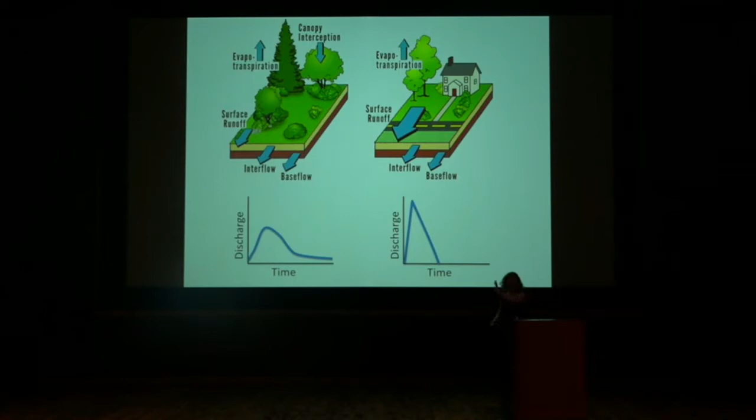Okay, that's fine, I'm glad we all know that. But there is a lot more to urban hydrology and urban watersheds than this diagram, and in fact this is the only time you're going to really see me invoking this concept today. So let me make the case for urban hydrology. I know Sally Thompson was here last week talking about the critical zone, so let's start there. We have the critical zone in urban watersheds too. We have rocks, we have soil, we have vegetation, we have climate. Just because we've urbanized, it does not take away the underlying natural characteristics of our region. But why do we work on urban watersheds? It's where we live.

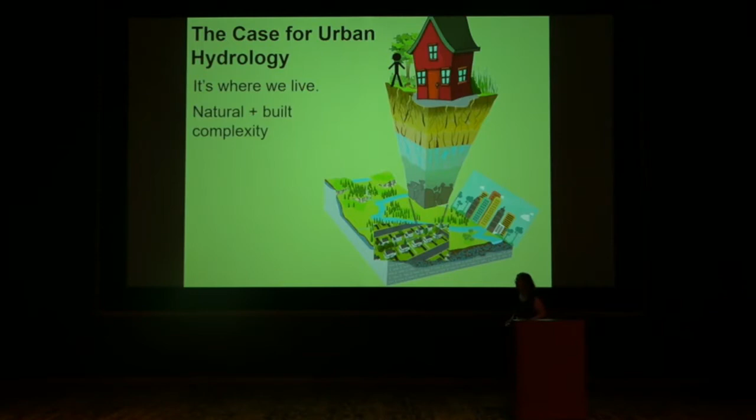People are there, so they're really important to us. We not only have the natural complexity, but now we have the built complexity. We are adding subdivisions, and if this is Reno, these must be casinos and high-rise hotels.

There's a lot of heterogeneity that we add to the land surface, and we also add it to the subsurface. We have pipes bringing treated water in, gas lines in, our sewage out. A lot of those times, those might cross topographic divides, so we have interbasin water transfers happening right and left in urban watersheds.

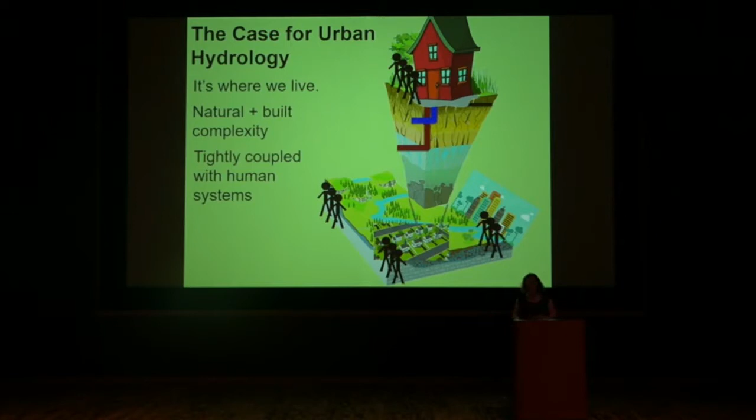So there's a lot of complexity in the urban environment. We're also tightly coupled with human systems. We cannot escape the humans in the urban environment. And these humans, as individuals and as groups, are making decisions that are affecting the management of the natural resources and the built environment. So we cannot study urban watersheds as if there weren't active decisions being made about how to manage these systems.

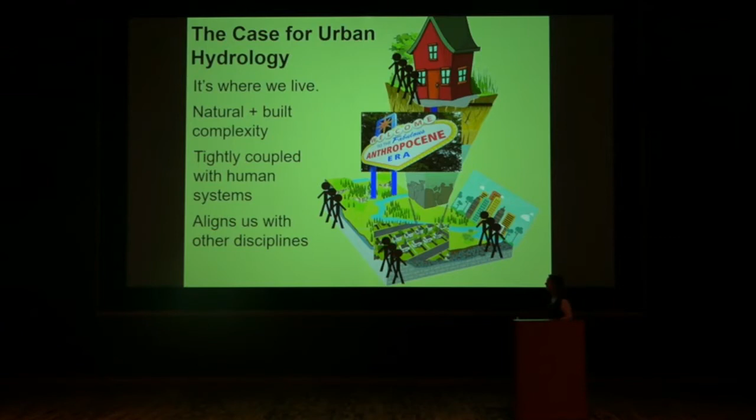Finally, working where the people are aligns us with other disciplines. I think normally that might say Las Vegas, but we're gonna talk about the Anthropocene because the place where our changing climate is gonna have its most significant impacts are the places where people are living, right? That's where we're gonna feel the effects. And so integrating hydrology into that conversation is an important thing that urban hydrology lets us do.

And then finally, it makes us relevant to policymakers, right? We can make arguments that we need to pay attention to hydrologic science because that's gonna tell us about flood risks on the Truckee River, or stormwater runoff, or adequate drinking water supplies for the arid West. Those are the things that are gonna hook policymakers on supporting hydrologic science research, on supporting the USGS stream gauge network, all the things that we want from policymakers. Urban hydrology gives us the buy-in to get there.

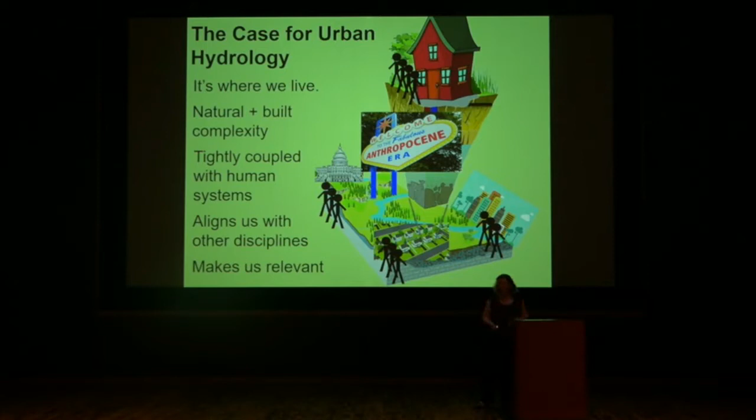So let me break some of these things down a little bit more and give you the sort of one slide per bullet point level of argument for urban hydrology. Again, this is where we live. Charlotte, I think, is something like the 20th biggest urban area in the United States, but it doesn't really matter. The point is there are a lot of big cities in the United States.

Over 80% of Americans live in urban areas, and those occupy less than 3.5% of the United States surface area. And that's just the contiguous states, excluding Alaska. And this is projected to continue to increase. By 2050, it'll be 87% of Americans. Globally, more than half of the population lives in urban areas, and again, that is projected to increase.

We're also now seeing cities that are containing 15 or 20 million people, and they're still growing rapidly. So here's where I put a disclaimer in and tell you that my work is very American and developed world focused, and that there are real issues around urban hydrology and the provision of water infrastructure and sanitation in the developing world that would fall under the umbrella of urban hydrology, but in which I am in no way an expert. So we're gonna set those aside for this talk and focus on urban watershed hydrology as it applies to us here in the developed world.

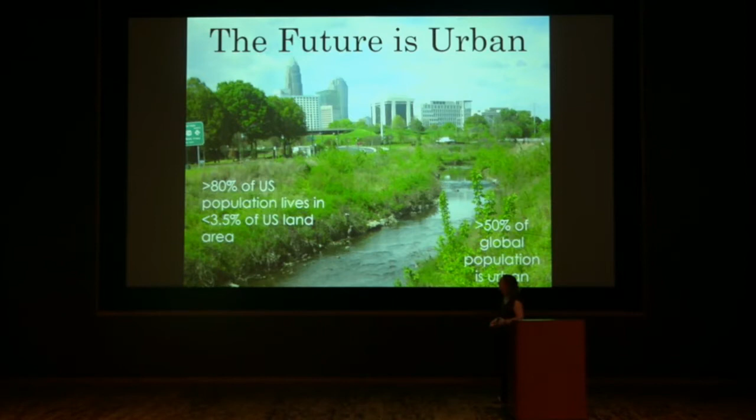I then moved from Charlotte to northeastern Ohio, where I live now. I live about here. And we have Cleveland and Akron, and those are shrinking cities, places where the population is moving out, but the urban infrastructure is still built, and it's still affecting the hydrology. But the cities aren't really shrinking in the metropolitan sense. All this green here, those are areas where the population is increasing. So we have, even with a static population, we have an expanding urban footprint.

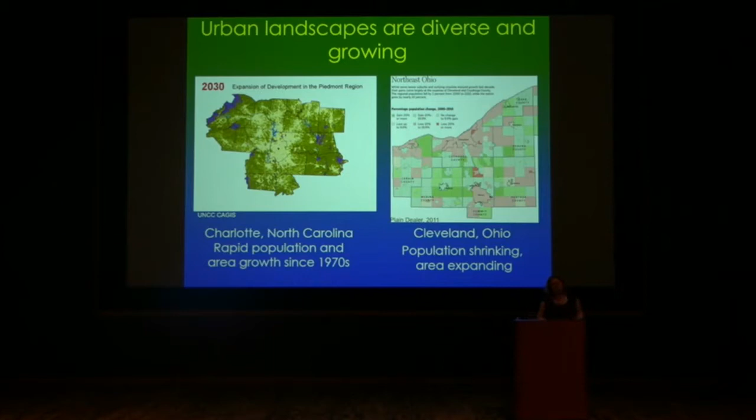We have this urban footprint, but it's on top of the naturally variable climate and landscape. So we have geology affecting topography, affecting soils, affecting the underlying bedrock, the glacial history of a region or not, and then we have climate.

This can mean that the same sorts of urbanization happening in two different areas produces very different hydrologic response. So if we take two cities in the southeastern United States that basically have the same rainfall and same climate regime, and look at the response in base flow or groundwater recharge, we see big declines in base flow and groundwater recharge in Atlanta, and huge increases in Austin.

What's the difference? It's not that people are any different in those two cities, it's that Austin is built on limestone and karst, and water that goes into the soils goes down into the bedrock and supports the streams. Atlanta is built on crystalline rocks with clay soils, and water tends to run off much more.

Similarly, we would say in general that high flows increase as we increase urbanization, but the shape of that increase - is it a linear response with increasing urbanization intensity, or is there some sort of threshold response, or is it something even different? Again, that's going to vary by region.

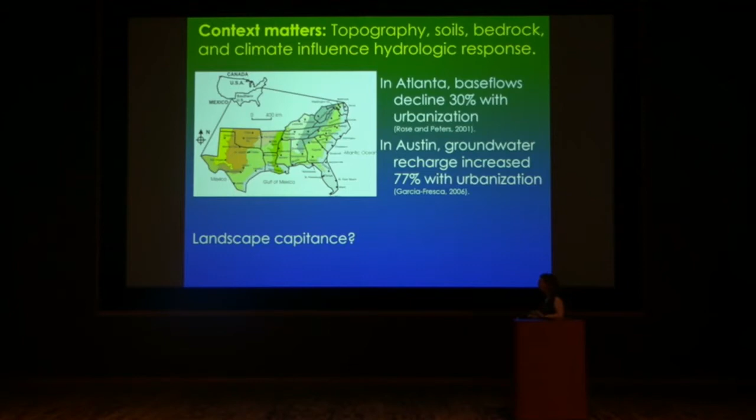Some folks, Brian Miles and Larry Band, have proposed this idea of landscape capacitance, which is sort of the hydrologic ability of a landscape to absorb a land use change or urbanization without affecting the hydrology. So our underlying natural characteristics plus our climate are going to affect the hydrology we get in urban areas.

Meredith Steele has done some really interesting work on just looking at the shape and distribution of water bodies in different environments. So this is sort of taking our natural environment times the land use decisions we make when we urbanize and looking at the hydrologic response. This is one figure from one of her papers.

Things have gotten a little cut off, we've lost some axes, but this should be the urban water body density pre-development versus post-development. What we see is that in dry areas, when you urbanize them, you get a higher number of water bodies in that landscape, and in wet areas, you get fewer of them. So that's an idea that there's sort of a convergence in the density of water bodies, number of water bodies, area of individual water bodies, or a homogenization of surface water expression as a result of urbanization.

That work aligns with some work that Peter Groffman and colleagues have done, and they've proposed this idea of ecological homogenization of the urban environment across cities, so that Phoenix and Baltimore might look more like each other in the urban area than they look like their natural counterparts outside.

However, if you go a few more figures in Meredith's work, you can kind of come up with a different interpretation. Here she's plotting a change in water body area versus a change in water body density. So some areas are getting wetter and some areas are getting drier. Sometimes water bodies are becoming more consolidated and sometimes they're becoming more fragmented.

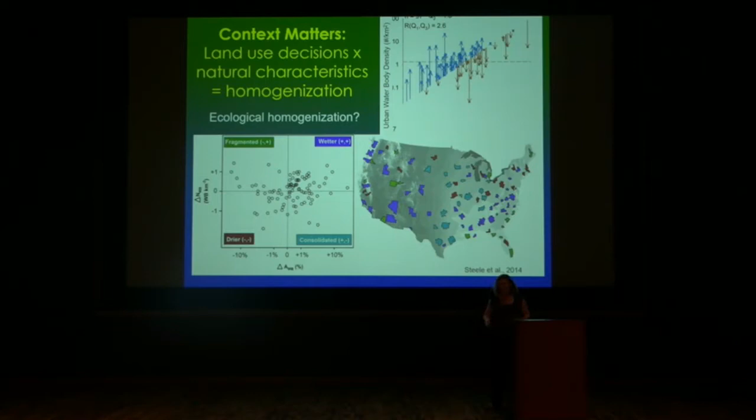So they're all ending up looking more like each other, but the pathways or the impacts of the urbanization on the natural landscape are quite different. You can see some regional patterns here - the southeast and the west are getting wetter, and the Midwest is getting more consolidated. What's driving that? Again, it's not the people that are different there, it's what the landscape provided in terms of water bodies to start with.

That segues nicely into another level of heterogeneity, the built complexity of the environment. So this is my old subdivision in Charlotte. This is downtown Cleveland. Obviously, the intensity of the development in these two areas is quite different. The age of development is quite different.

Whether we are talking about changing urban hydrology by going from forest and farmland to urban, or whether we're talking about redeveloping brownfields or abandoned industrial sites, that's a really different proposition in terms of the potential hydrologic ramifications.

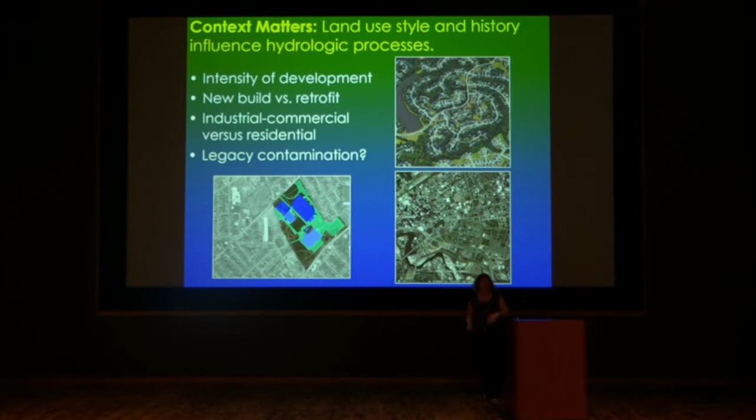Even within a city, we have land use variability. Here's a neighborhood, probably about 45-50% impervious surface cover, all fragmented up into little tiny backyards and front yards. This colorful area here is an industrial site, 62 acres, 52% impervious, but our impervious surface now comes in much larger chunks. This is a 6-acre rooftop.

It is enormous, right? And so the hydrologic impacts of this 50% impervious versus this 50% impervious is probably really different just because of the spatial arrangement of the imperviousness.

And by the way, you can't dig in the ground here because of legacy contamination issues, and you can't export any materials off-site.

So we also have water quality. While I'm focused on water quantity, we also have all these water quality repercussions of urbanization and different land use histories and land use choices.

It doesn't stop at the subsurface or the surface. Our subsurface architecture is also dramatically changing the hydrologic response in urban areas. So we have storm drainage, which is basically designed to efficiently shed water from parking lots and rooftops into the nearest water body by piping it. We're really increasing the drainage efficiency of the landscape.

We also have wastewater. In a new modern city, we would send our wastewater to the wastewater treatment plant, where it would then form a point source of discharge to a local water body. So we're potentially having an interbasin water transfer and a big point source of discharge that you wouldn't pick out on a map of the stream network.

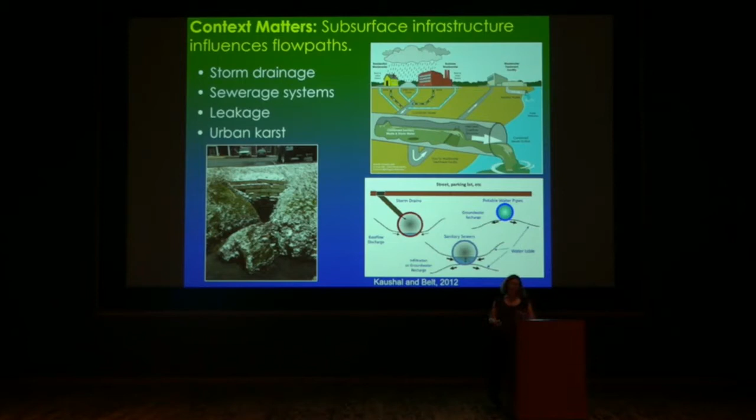We might be exporting a stormwater flow that has actually never really been surface runoff. The magnitude of these leaks and all of the other subsurface manipulations to hydraulic conductivity, utility trenches, subway systems, basements, all of that sort of thing have caused some hydrologists to describe urbanization as a karstification process.

Let's talk about stream channels. I haven't seen the Truckee River yet, but I'm hoping to later this afternoon. We're really fond of manipulating and engineering stream channels in urban areas. These two pictures were taken by my colleague Aditi Bhaskar in the same creek, less than a mile apart. The potential interaction between Little Dry Creek and its riparian zone or groundwater are quite different in these two pictures.

This is my friend Little Sugar Creek in Charlotte. What is this? This is dry day flow, perennial base flow, coming out of, well, that's not a bridge, that is an opening from a buried reach of stream. Here I am in a buried stream in Raleigh, North Carolina. Again, it hasn't rained in days or weeks, but we are seeing a stream under the subsurface. Many urban areas have lost essentially the entire tip of their drainage network. All your headwater streams are buried in places like Philadelphia, Cleveland, and Baltimore.

And an even higher percentage of streams have been cut off from interaction with groundwater because of channelization.

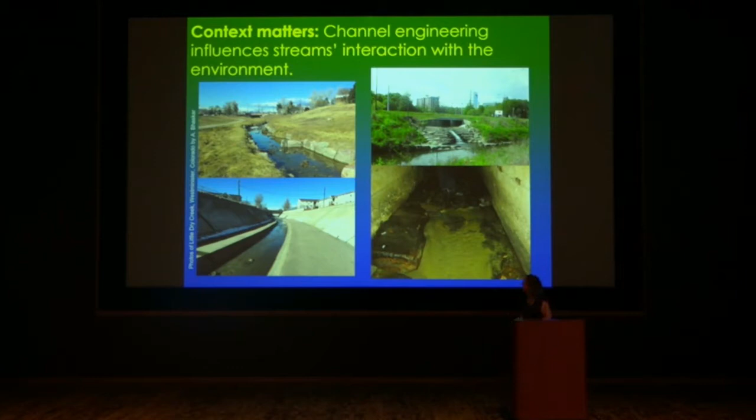All of that is about things people build, but people also act, and we make environmental decisions even when we don't think we are making environmental decisions. Individuals and institutions are influencing urban hydrology every day through the things that we do.

Institutions could be a homeowners association, a park district, your city council, the state, or the federal government. They're making decisions based on rules and regulations, incentives, who's the squeaky wheel that gets the grease, and cost. There's some sort of formal framework governing a lot of the decision making at the institutional level.

But there are also social norms. We're gonna do this because we've always done it that way—how many times have you heard that? Same thing applies to the management of urban water. We're not gonna build permeable pavements because we heard they're a pain to plow in winter. Individuals make decisions about keeping up with norms, keeping up with the Joneses—I better have a nice green lawn in Reno because that's what my neighborhood wants. But institutions make decisions that way too.

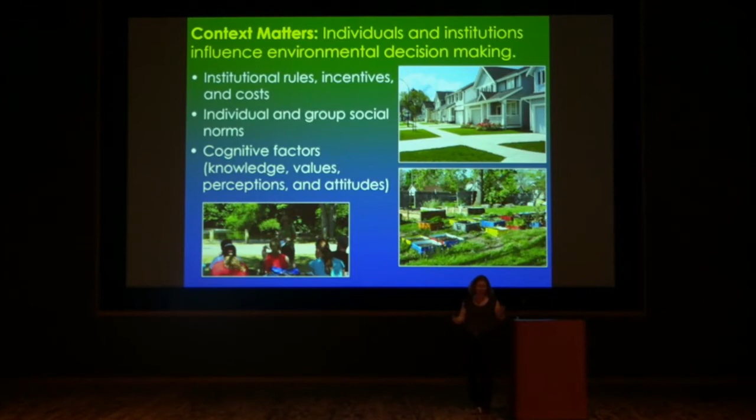Then we get down to cognitive factors: people's values, knowledge, perceptions and attitudes about the environment. Do they consider themselves pro-environment? Pro-green lawn? How do they perceive things? Is wastewater or stormwater a resource, or a problem?

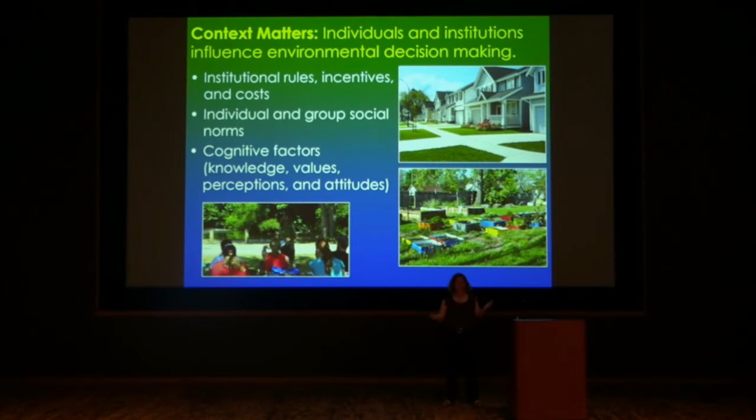Knowledge is one piece of this, and often our tendency is to say if you just knew more about water, you'd exhibit more pro-environmental behavior. It doesn't work like that. That's a really ineffective communication technique because of what's known as the knowledge to action gap—just increasing people's knowledge doesn't necessarily translate into action, particularly if that knowledge is at odds with their values, attitudes, or the norms and rules they're working under.

It's also about listening to people telling you what they perceive or what's important to them. We get much farther working on all these other levers rather than just educating people—although I do educate people too. I'm working with a group of teachers in that picture, talking about stream geomorphology and hydrology, and they'll bring that back into their classrooms with kids. So there's certainly a role for education as well.

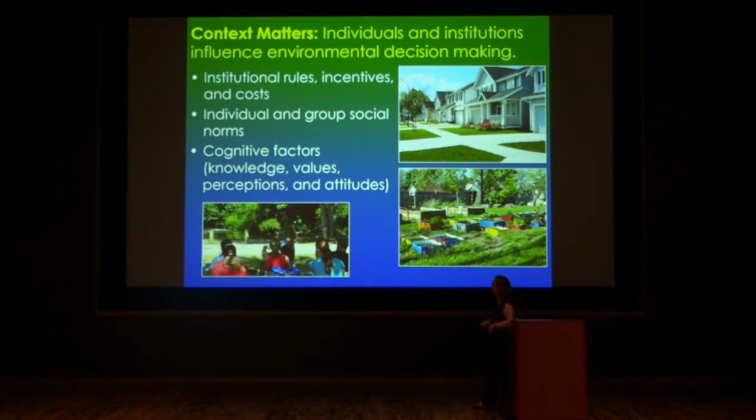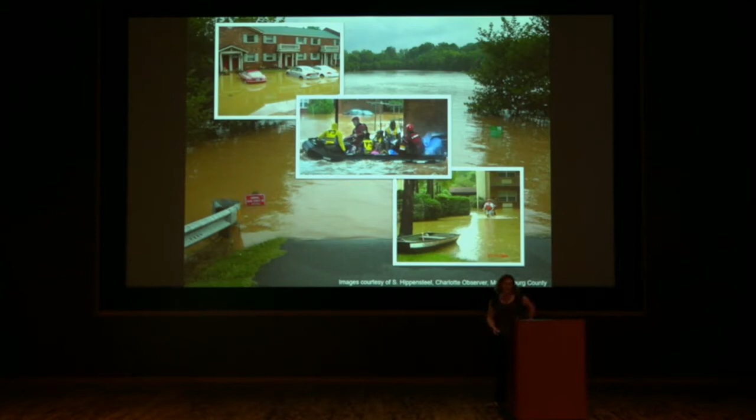This sign says warning, trails subject to flooding. Charlotte maintains a swiftwater rescue team to evacuate people from homes and businesses due to urban flooding. In Florence, they had it again—6 inches of rainfall. So we have to think about all these systems responding to a variable and increasingly intense climate.

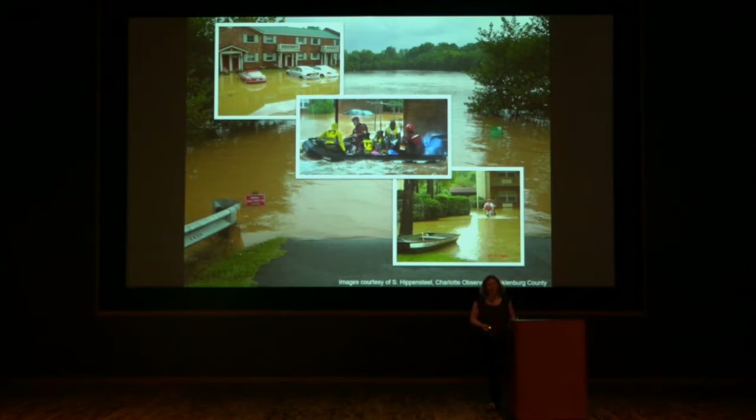But that's where we can come back to the human systems, because what is Charlotte doing? If you look closely, not only is there a trail, but that's the top of a soccer net. This is a good use of a place that floods, because we're not building homes and businesses there. Charlotte is actually aggressively buying out flood-prone homes and businesses and getting people out of the floodplain. That's a social system working to alter the response to the hydrology, and by creating floodplain storage, peak flows might be somewhat more dissipated as we move farther downstream.

So we have all these things happening in urban watersheds, and I was on the plane yesterday thinking, which is the most important? Can we think about these as a hierarchy of controls in urban hydrology? This is my personal ranking of things. I think that ultimately, the natural capacitance of the landscape, the geology and the climate, is going to influence hydrologic response. Reno is never going to be Charlotte.

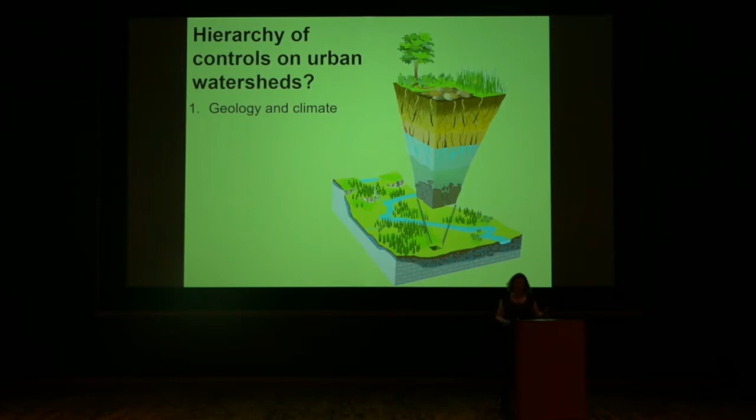We also have the decisions that we've already made, the legacy land use and infrastructure decisions, the things that are already built. As the shrinking cities are discovering, you don't unbuild pipes and pavement just because people have moved out. Those continue to be there.

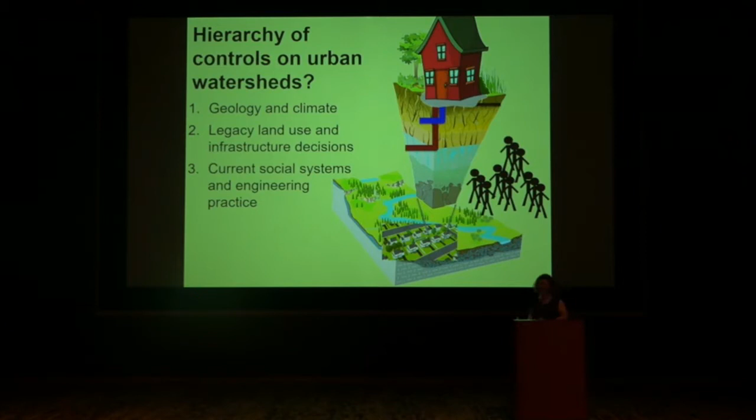Then we get the current social systems and engineering practices that we follow now. These are the decisions we're making today that are going to affect things today and into the future. And then we get the decisions we make about the future. This could be local or individual level decisions, like I'm not going to buy that house in the floodplain, or as a city, we're going to buy out the floodplain. Or they could be about how we're going to mitigate or adapt to a changing climate.

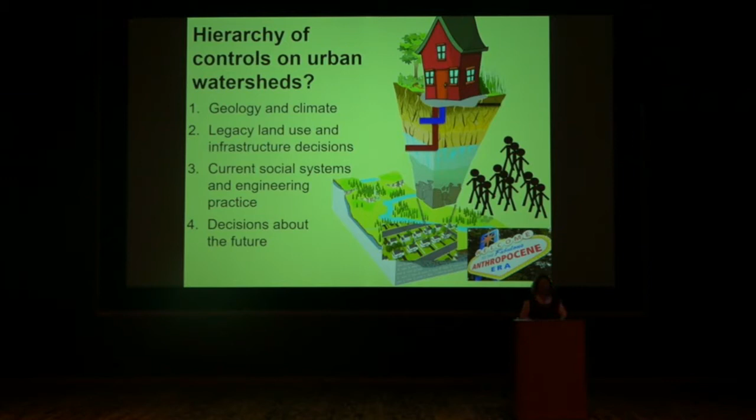So this is what I would come up with as a hierarchy of factors influencing urban hydrology. Let's zoom in now to my research, because of course I can't work on all those things. I think they're all fascinating, and there's things I'd love to add to those previous slides.

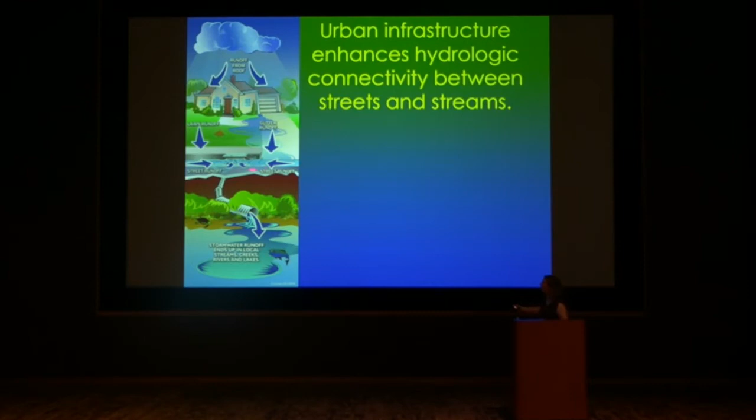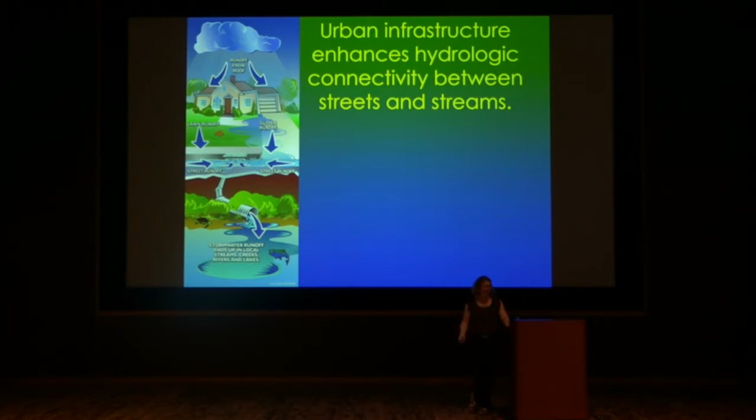I've really focused my work on stormwater runoff and stormwater management. Drawing on the idea that one of the fundamental changes urbanization has on the landscape is increasing the drainage efficiency and hydrologic connectivity via downspouts, gutters, curb and gutter, and storm sewer pipes out to the stream. That's busy delivering water out to the stream and delivering all the other yummy things we put on our landscape - our fertilizers, our dog poop, our brake linings - all of that is coming into our urban watersheds. This enhanced hydrologic connectivity increases peak flows, increases bank erosion, degrades water quality in a whole host of ways, and all of that ultimately flows down and affects stream ecosystems.

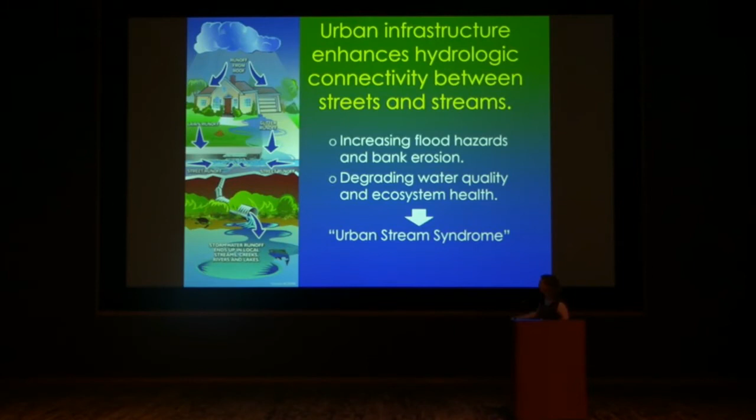Ecologists have coined this urban stream syndrome - a host of ills or symptoms that result from urbanization of the landscape. So if you don't think this is a pretty picture, and you're like that fish and you're unhappy and you want to do something about urban stream syndrome, I would argue that the number one thing you need to do is to stop stormwater.

We need to keep that runoff out of the urban streams, or at least slow down the flow. I am not telling you anything new - Luna Leopold published a great paper on hydrology, land use and urban planning in 1968. We have been building stormwater management structures in our urban areas since the 1970s, and they've evolved over time.

A lot of the early generation of stormwater structures, which are still built today, are centralized near the outlet of a neighborhood or development, or all the way at the end of the Walmart parking lot. They're focused on detention, on slowing the flow down. There will be some outlet structure with a pipe of a certain diameter, and the release rate of water from that pond or wetland is controlled by the diameter of the pipe and the hydraulic head. That's good - it doesn't affect the water balance, but it slows the release rate, and there might be some settling and biology happening in that pond to change water quality.

We could string several of these things together and improve the system, but these days the big vogue thing gets called lots of different names: green infrastructure, low impact development, or source control. The idea is that rather than waiting for all that stormwater to get to the end of the neighborhood, we try to stop it very close to the source - things like infiltration trenches and bioretention cells sprinkled throughout the parking lot, a rain garden in your front yard, a green roof - all of these are source control.

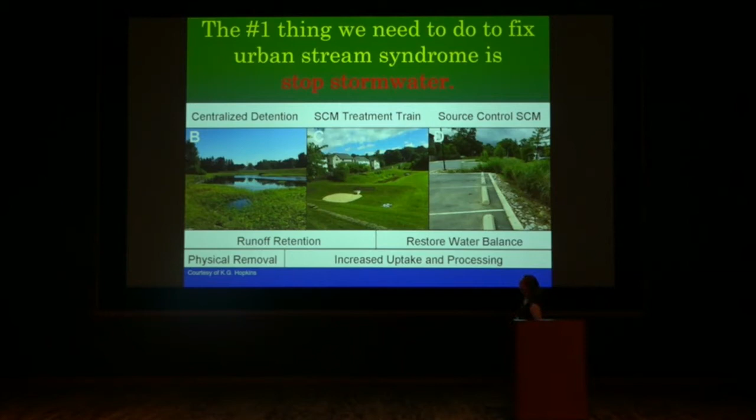Okay, so I told you I wasn't the first person to think of these things - we've built millions of them. By a really rough estimate that I've done, we spend something like $1 billion a year on stormwater management in the United States. And people have been studying them.

There are probably thousands of papers out there that have looked at the flow coming into a pond and the flow coming out of the pond, measured some water quality parameters, and said the pond improves water quality and reduces peak flows. If you boiled all of those thousands of studies down, you would see that for any individual type of stormwater control, there's a broad range of effects.

So that's fine and good. We know a fair amount about that. The question that really has been driving my research for the past few years is what happens when we start to add lots of these stormwater controls to the landscape.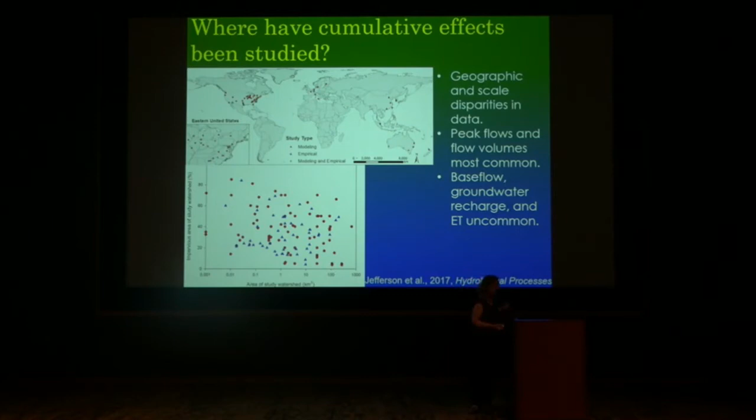All right, well, but what do we know? We know a fair amount about peak flows and about flow volumes, because those are the things our regulations have focused on. However, if you want to know about low flows, groundwater recharge, evapotranspiration, this gets to be pretty sparse. There might only be 2 or 3 or 1 dot on that graph that has actually quantified the effects of stormwater controls on, say, evapotranspiration.

And then peak flows—well, that covers a lot of ground. Is it a whole series of peak flows from a distribution of different size events? Are we talking about the 2-year peak flow, the 100-year peak flow?

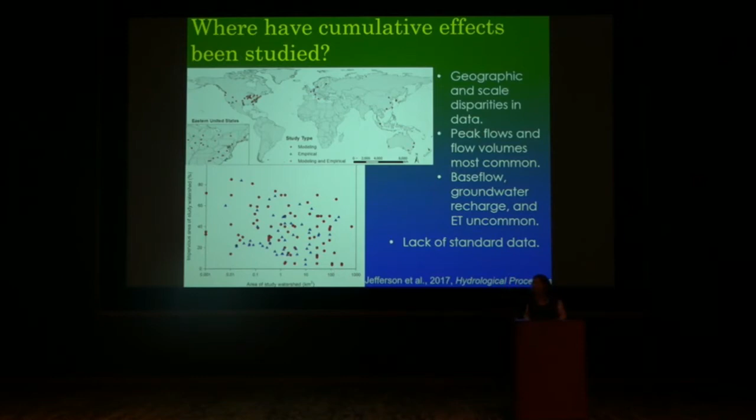When we started to really break all of these 100 papers down, we couldn't actually do the quantitative meta-analysis that we wanted to do, because there was very little standardization in the metrics people were reporting. What were the controls? Was your control watershed an undeveloped watershed, or was it a watershed with no stormwater management? There's no standardization among the studies that are available.

So what we eventually came up with was this sort of hypothesis. And now the challenge is to put data on our hypothesis.

So if we take untreated impervious area and a hydrologic metric of our choice—let's just take 2-year peak discharge here because we actually have some data—we know that as we increase impervious surfaces, we will tend to increase peak discharge. The shape of that arrow is going to be dependent on that landscape capacitance, and all those urbanization and land use choices.

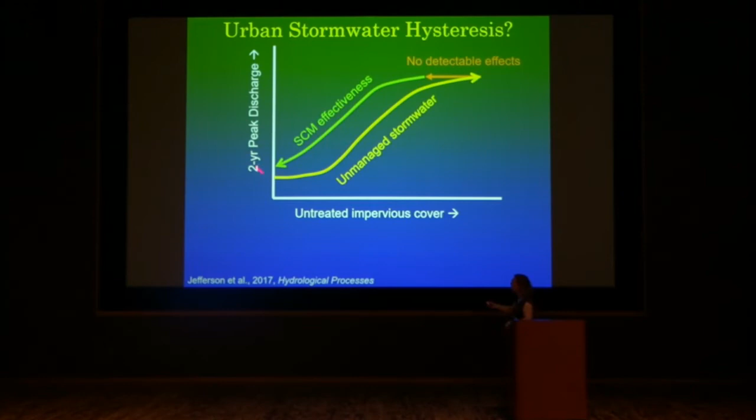If we have a 10 square kilometer watershed and we put in a pond that treats 20 hectares of land, are we going to see the effects of that? Probably not. As we start to add stormwater management to the system, there's some amount of investment where we can't detect the effects - we don't see the outcome at the stream gauge at the bottom of the watershed. But if we continue adding stormwater management, we'll start to see an effect until eventually we've treated all the impervious area, but we're not quite back to where we started. We expect some residual because of all the other things changing in the system, and the fact that no stormwater control works perfectly.

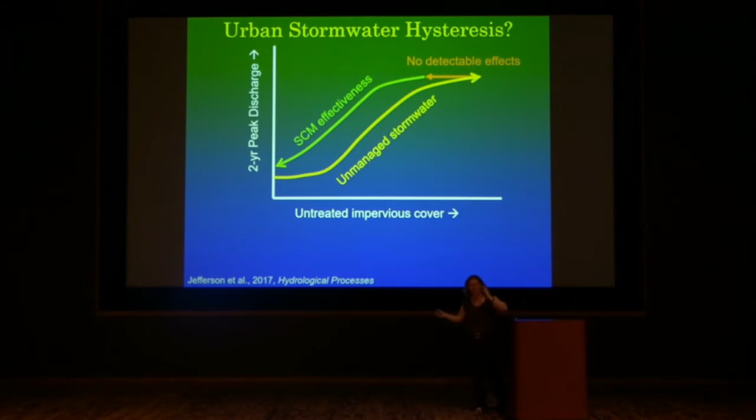This is the hypothesis we've put out to the hydrologic community - show us the data, this is what we've gleaned. We have a bunch of these metrics, a bunch of these figures. Let's see how they work in real places.

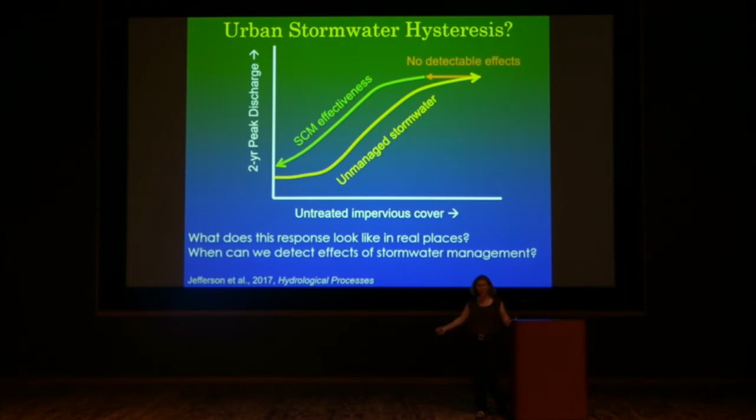A big question I've been stuck on is: how big is this zone of detectable effects? How much investment do we need to pour into managing stormwater in urban watersheds before we can go back to our stakeholders and the people paying the bills and say, guess what - it's working, your peak flows are going down? Because that's what they really want to know.

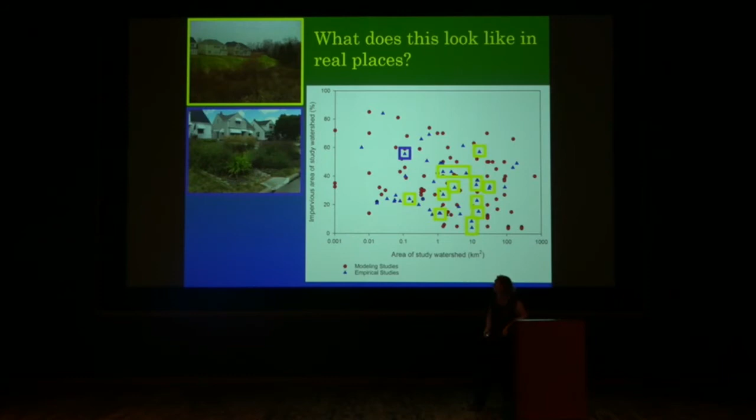I'm going to quickly tell you three stories: one from Charlotte with a series of USGS gauges, one from the Cleveland area where we experimentally manipulated streets so we could do a paired watershed study, and a modeling study slowly coming towards review and press, also in the Cleveland area, of a larger watershed.

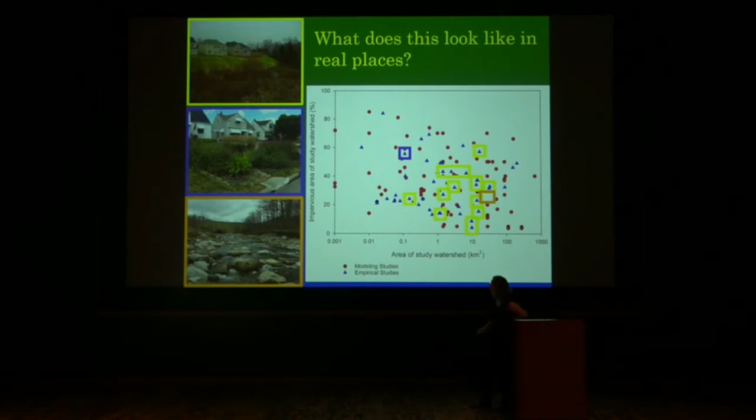Back to Charlotte, North Carolina. Charlotte, because of its urban flooding problems, has one of the densest USGS stream gauge networks in the United States. The county also built a comprehensive stormwater control management database, so we were able to know where all the stormwater controls were and how much water they were treating. Because of its urban flooding issues, Charlotte has had a stormwater fee for more than a decade, spending $25 million a year as a city-county in managing stormwater.

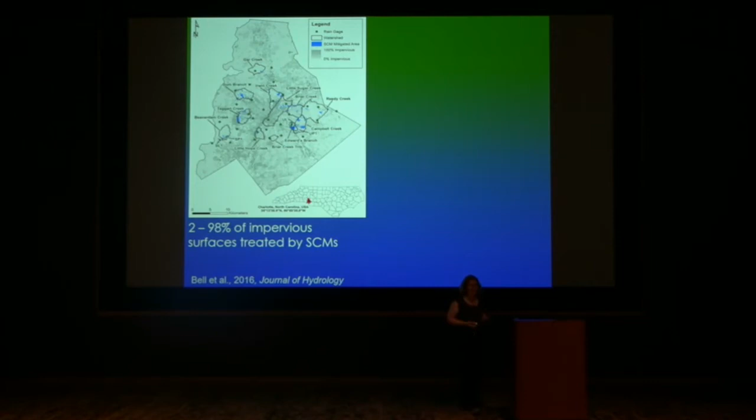They don't. In every single metric, impervious surface is the number one predictor of hydrologic response. I'm just showing you one here: runoff ratio. We thought maybe if we segregate out small storms from big storms we'd see something different - no, it's just impervious surface. So that tells us something about this landscape.

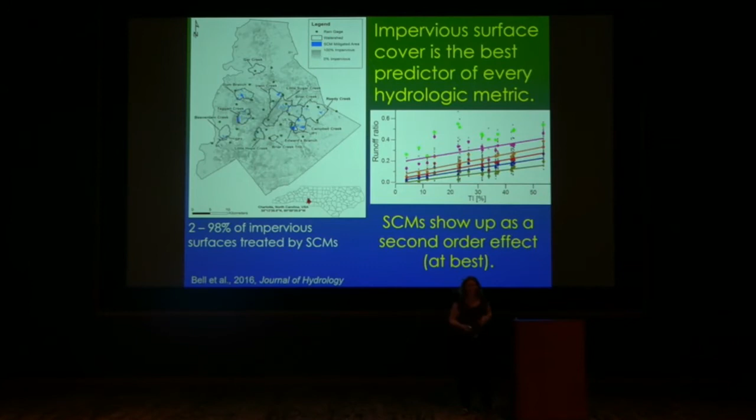It was only when we took the residuals between the individual watersheds and their trend lines that we saw stormwater controls show up. They show up as a second-order control, and even then not in every hydrologic metric - sometimes it's tree cover in the watershed that's important. So what does this tell us? It says that with our existing monitoring network and space-for-time substitutions and all the quirks of what's happening on the ground, we have a really hard time detecting the signal of stormwater management in this urban area that has invested tens and hundreds of millions of dollars in it.

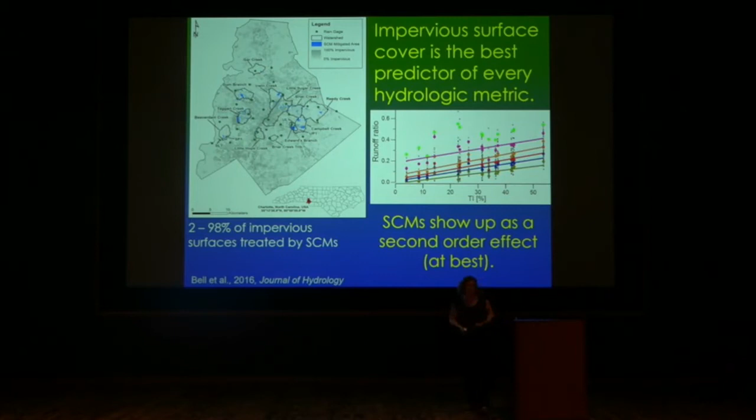Why is that? We started to drill into it with some breakpoint analyses. This is a low impervious watershed and a high impervious watershed, and we plotted precipitation versus peak discharge. In this watershed, it can rain up to 10 millimeters and the stream really doesn't do anything, and above that stream flow goes up. In this other watershed, it can rain less than a millimeter and then the stream starts to respond.

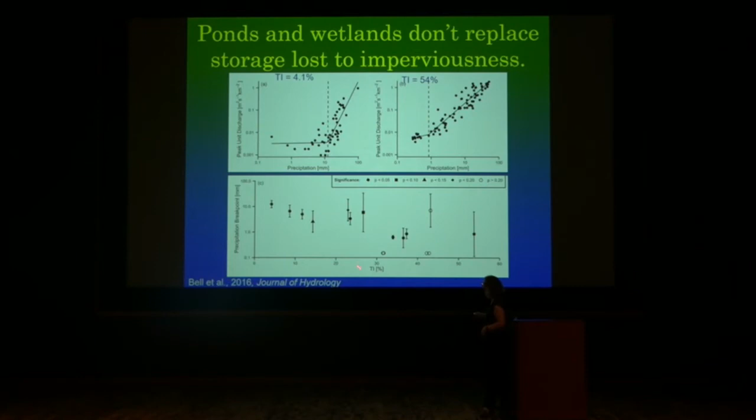If we plot those breakpoints for all of our 16 watersheds, notice that again we're plotting it against impervious surface - it's not stormwater control that shows up, which tells us that the stormwater control we're putting in the form of ponds and wetlands is not replacing the storage or landscape capacity that's been lost as a result of urbanization. All the topographic roughness, puddles, and canopy interception - all those vehicles for storing water are being decreased, and our ponds and wetlands are not sufficient to override that signal.

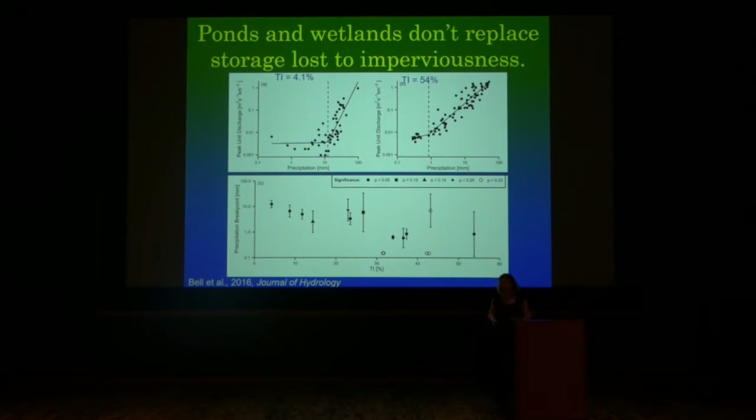All right, well that was pretty depressing. So let's control the conditions. Let's build it and see what happens.

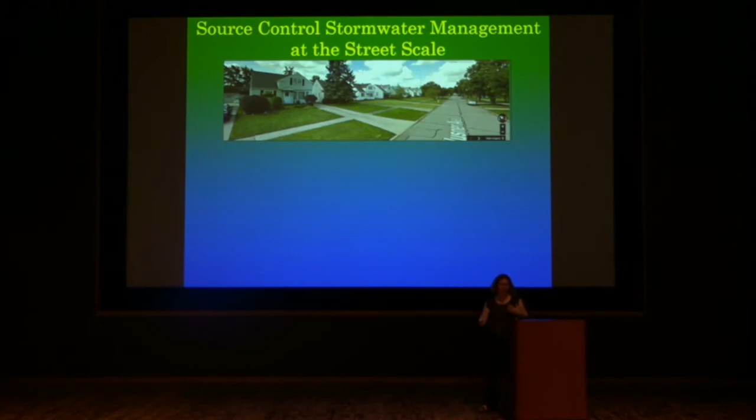So now we're up in suburban Cleveland, a 1950s development. We want to put stormwater control in this street, because right now it's just dumping its stormwater straight into a stream inside a park. And so with money from the Great Lakes Restoration Initiative, we designed a paired watershed, a before-after control impact design.

And so we focused on bioretention cells collecting street runoff. In this, Clevelanders call this the tree lawn. Akronites, like myself, they call it the devil strip. Anyways, that's the area we have to work with, and in a few cases we put rain gardens, and we also gave homeowners rain barrels.

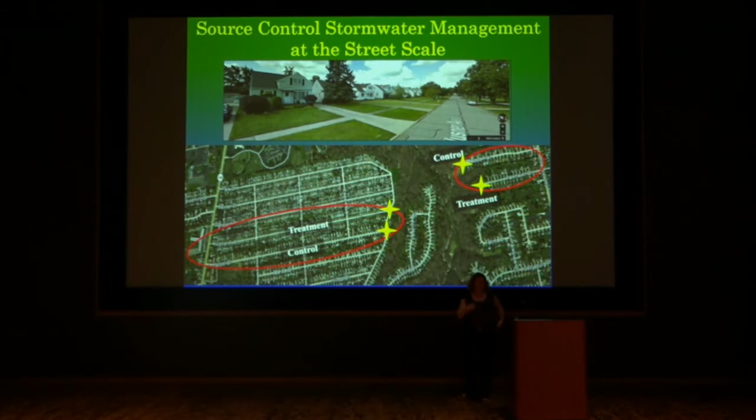So we set up 2 treatment streets, 2 control streets, monitored them for a year, and then went out and tried to convince the homeowners to let us rip up part of their front lawn.

There are about 200 houses on Klusner Avenue, and I'm just going to focus on Klusner Avenue. We succeeded in convincing 12 places, and that wasn't even 12 individual homeowners, but that was just 12 places where we could put bioretention cells in. Those people also got to have up to 4 free rain barrels, so we got rid of 22 of those. And 2 people had nice street trees, so we put a rain garden in the front yard instead.

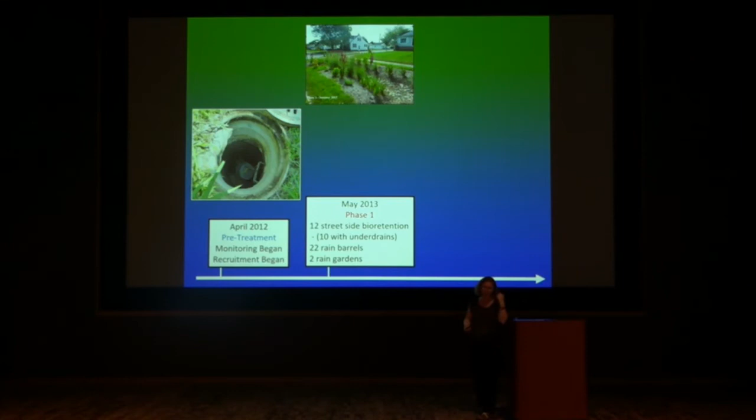The rest of the people, we knocked on doors, we flyered, we had town halls. We could not get anybody else to participate. Until they saw their neighbors getting these free gardens, and then they started calling us. Hey, why didn't you ever tell us about that?

So phase 2 happened because we had money left, and we built some more street-side bioretentions. We changed the engineering of them a little bit. We put in some more rain barrels and built some more rain gardens in front yards and backyards.

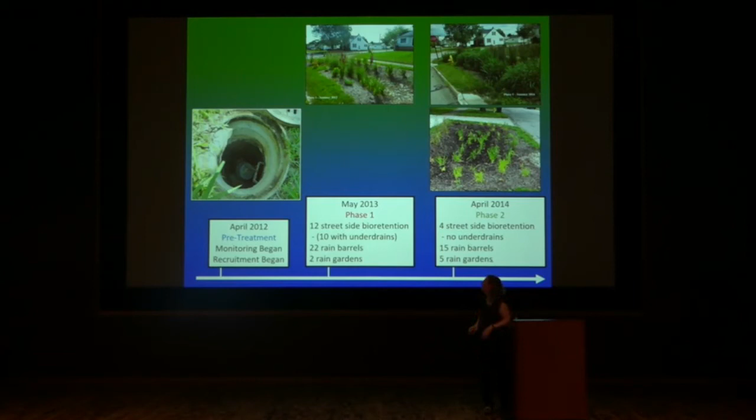The plants, this is the same rain garden in 2013. Here it is in 2014. It was great. We got, as a total, 12.5% homeowner participation. Let me give you this for free. Oh, we'll take care of it too. 12.5%.

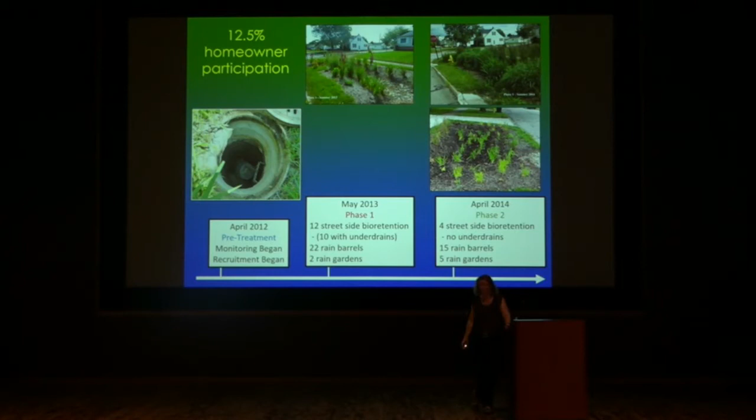But it worked, yay! So this is our control watershed. This is our treatment watershed. We have our pre-treatment data, and our phase 1 data looks just like our pre-treatment data, but phase 2 is lower volumes of storm flow in our storm sewers from the system, and that is a statistically significant difference. So it's decreasing by up to 40%.

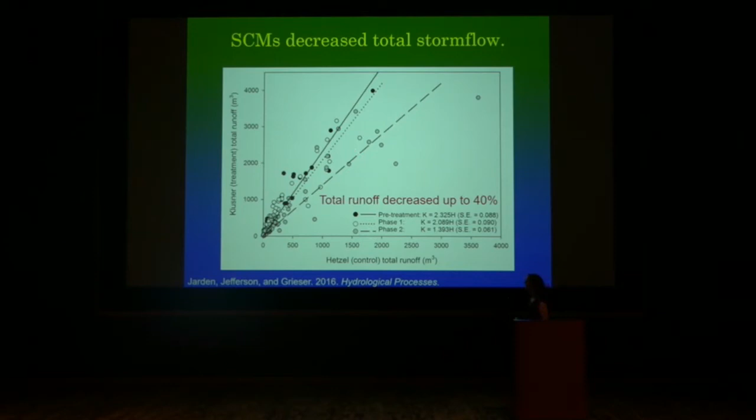The peak flow data is messy because real world data is messy. In our pre-treatment period, we didn't get any storms that generated high peak flows. But we see this shift downward between phase 1 and phase 2 in our larger storms, and no significant difference in our little storms, which is sort of interesting.

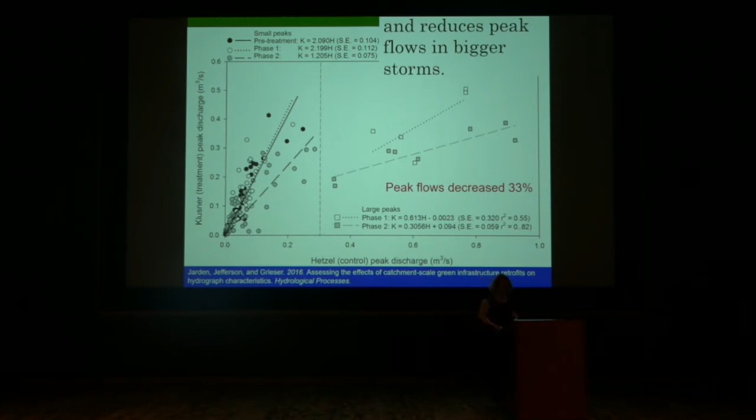So now we have to interpret this. So why did phase 2 work so much better? So this is a cross-section through a bioretention cell, and in phase 1, all of the bioretention cells had this overflow inlet and this perforated pipe plugged back into the storm sewers. So if water infiltrated down and then entered that pipe, it could go back to the storm sewers.

In phase 2, we didn't build that in there because it saved us money, and it turned out that we didn't really think we needed them. So now any water that flows into a bioretention cell in phase 2 has no opportunity to return to the storm sewers, and therefore our volumes are going down more dramatically, and our peak flows go down. Because in phase 1, we had curb cuts and this gravel superhighway channel running right to our overflow inlet.

In phase 2, there's no underdrain, therefore no overflow inlet, therefore no gravel superhighway. Now water is forced to spread out and infiltrate.

Why did we see effects in big storms and not little ones? It takes a certain depth of flow along the curb for water to actually turn the corner and go across that slightly rough curb cut into the bioretention zone. My poor grad student went out there and stood on the street a lot in the rain to figure this out. If it's raining lightly, the water just continues to the storm sewer catch basin, but if it's raining hard and the depth of flow along the curb is deep enough, it goes into the bioretention cell and we take it out of the system. The tiny little details matter, right?

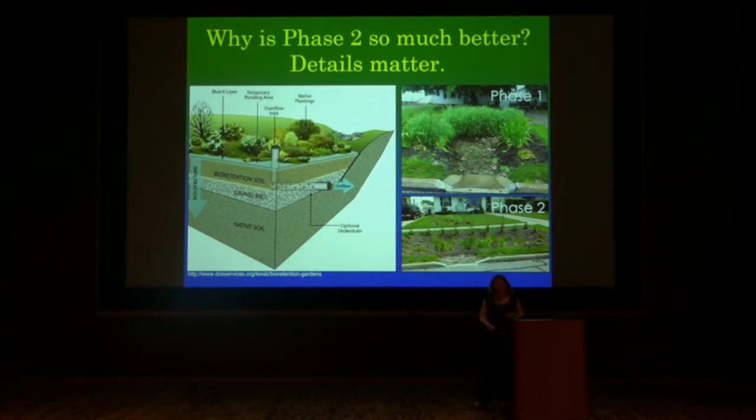We also talked to the people, working with social scientists. My grad student got really into this, and so we ended up with a whole other paper. I should say this is a master's thesis, and we got 3 papers out of it, so pretty awesome grad student in 2 years.

So what did we find? We reviewed lots of documents, we did a survey, we talked to people. Again, we had this low participation even with incentives. We see that in other studies where they've even tried to pay people to adopt stormwater practices on their lots. Very low participation rates.

Because people view stormwater management as not an individual problem. Shouldn't the city be taking care of that, right? Why should I do it on my property?

But we did see this social contagion. My favorite block is this one 87-year-old grandmother who treated it as a neighborhood beautification project, and talked her neighbors into it. We have 5 bioretention cells in a row. Next block down, there's none.

Is that optimized from an engineering point of view? Absolutely not. But from a social point of view, it was incredibly important for us that our participants participate voluntarily. We weren't going to say, we're going to dig up your front yard without you, because people value their green space. And the last thing the park district and the city want is a bunch of antagonized people.

After the project was over, we surveyed the homeowners. They could see what was happening, but we didn't really share data with them. We just wanted their perceptions of whether this project was a success or not.

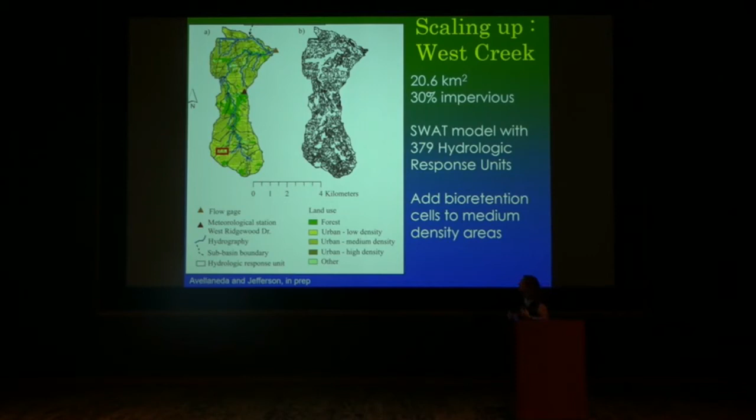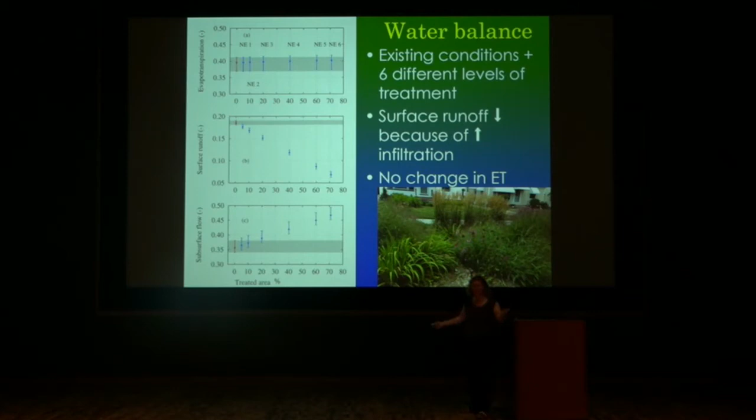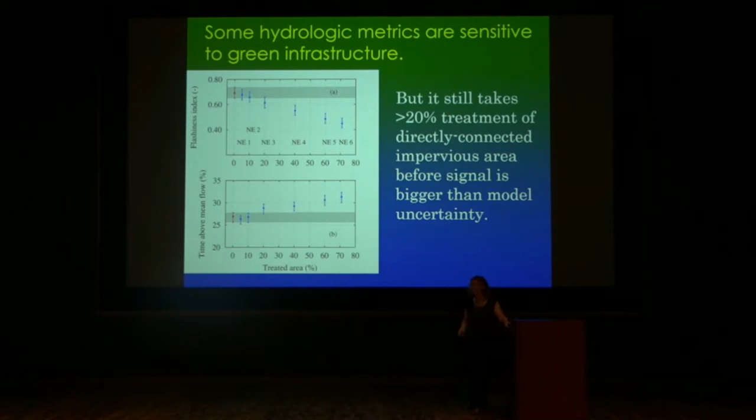But those are not your favorite hydrologic metrics, you say. Well, we can calculate anything, that's the beauty of a model. The 1 month flow, well, we can get there, but now we're basically convincing everybody to put a bioretention cell in on their property. That is maybe not socially realistic.

Can we move the 1 year peak flow? No, partly because bioretention cells in Ohio are not designed to treat the 1 year storm. They're designed to treat 3/4 of an inch of rain, which is about the 90th percentile storm. So if we set our environmental goal of stormwater management to reduce the 1-year peak flow, we'd be asking an unrealistic thing for the technology we're using. So we have to manage our expectations.

We know subsurface flow is increasing. Are our low flows going up? Not really, not in any detectable way, but look at the size of some of these uncertainty bands. Urban watersheds are really hard to model. We've got to get all those natural processes right, and we have to get all the built environment right, and there are basically no modeling frameworks that can handle all that. And even if they attempt it, they become completely over-parameterized monstrosities, so you have big uncertainty bands associated with it.

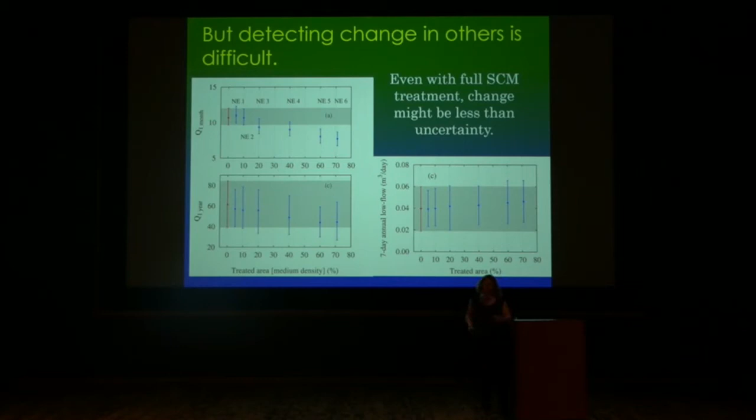So some of this is a science, a modeling techniques problem, and some of it is a stormwater problem at this point. So what are the takeaways? At small scales, we know that source control works. At larger scales, it's gonna take a lot of investment to get a detectable effect. And we have to be realistic about our expectations. We cannot ask something that is hydrologically impossible of our system. So if you're communicating with a stakeholder group or a policymaker, you might say it's not really realistic to decrease the 100-year flood in my urban watershed because I've added some rain gardens.

It's just, we're not putting the storage into the system to do that. Models are a pain, real data even more painful. Remember my experimental watersheds, the double paired watershed study? In the second one, they ripped up the street in the middle of our study, and then repaved it with really nice pavement, but stormwater didn't go down. We think it's because in the past, stormwater could fall off, the curb and gutter was all broken up, and the pavement had secondary permeability. So they made the stormwater worse by repaving the street. Real data, it's a pain.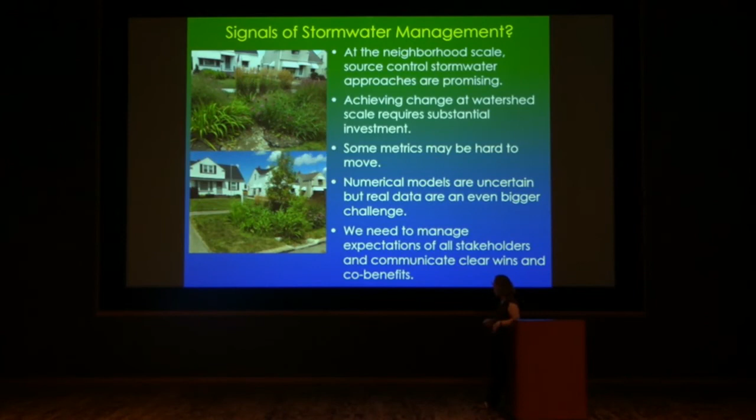So we need to manage expectations, we need to be communicating, and we also need to think about co-benefits. Maybe we can't win all the hydrologic metrics, but maybe we're increasing property values, or creating habitat, or there are other things we can do along with stormwater management that will create the win we need to also get the hydrologic benefit.

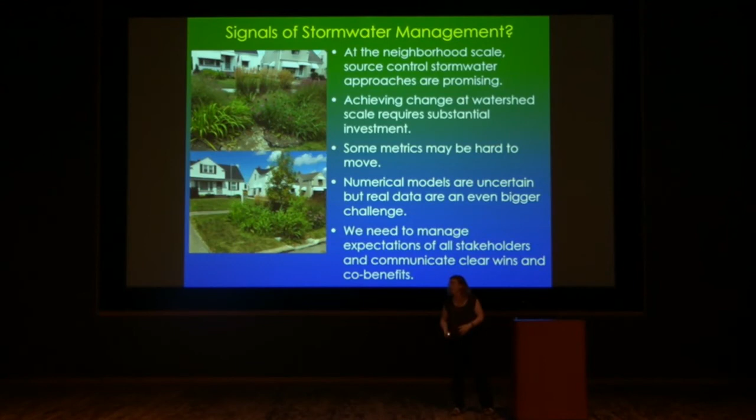Okay, so what's next? I just got funding, yay! We want to connect all these dots on the cumulative effects of stormwater management, starting with the people making the decisions and understanding what's influencing particularly the institutional decision-making about stormwater management. Then my piece comes in and we're gonna look at how stormwater management is impacting flow regime in a number of watersheds in both the Cleveland area and Denver area.

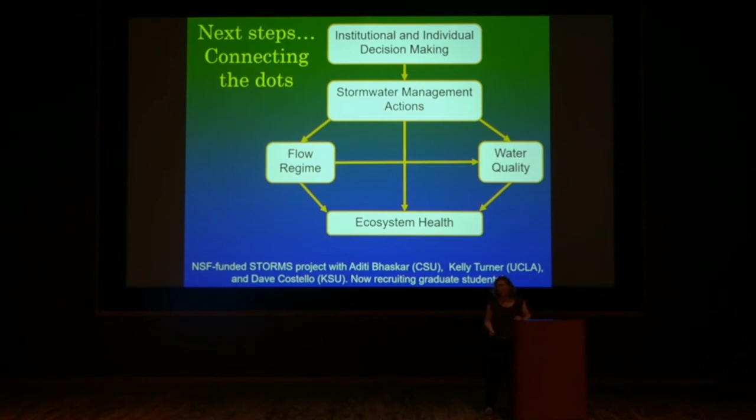And then I didn't talk about these pieces over here, but of course they are receiving all of this. There's interactions between flow and water quality and ecosystems. And so if that sounds exciting, come work with me. Tell your friends looking for graduate school that we are recruiting a couple of graduate students on this project.

More broadly, backing out of stormwater, what do I think our field needs in the next several decades? Answering the challenge that Anne gave me: we need to really look at this idea of landscape capacitance and regional variation versus the idea of homogenization.

Where do these two sort of, I could almost set them up as competing theories, where does that work, where does that not work, both in terms of space and in terms of the type of hydrologic response that we're measuring. We've invested a lot in understanding Baltimore and Phoenix and the urban hydrology and urban ecology there. Does that explain what's happening in Reno? Or in Denver, or Cleveland, or Charlotte? Right now, we don't know. So we need to start to figure that out.

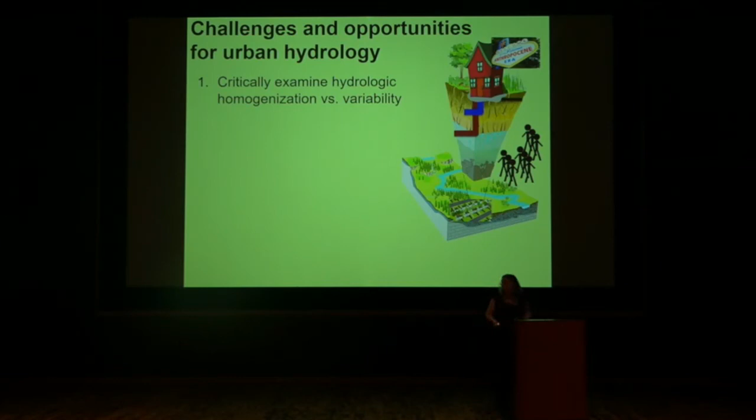We need to embrace the underperformance of stormwater systems and the leakiness of pipes. These are things that we are missing in a lot of models. When I modeled, I built thousands of bioretention cells in West Creek watershed and assumed they all work perfectly, even though all of my monitoring data says they don't all work perfectly, right? We need to figure out how to put that heterogeneity into our conceptualization and into our models.

We need to talk about people. We need to really engage with social scientists and embrace socio-hydrologic frameworks. And we actually need to think about knowledge co-production, where people who are not hydrologists help us come up with the scientific questions we're going to answer, the approaches we're going to use to answer them, help us analyze the data and think about the implications of that data. So we're involving stakeholders in all parts of the scientific process.

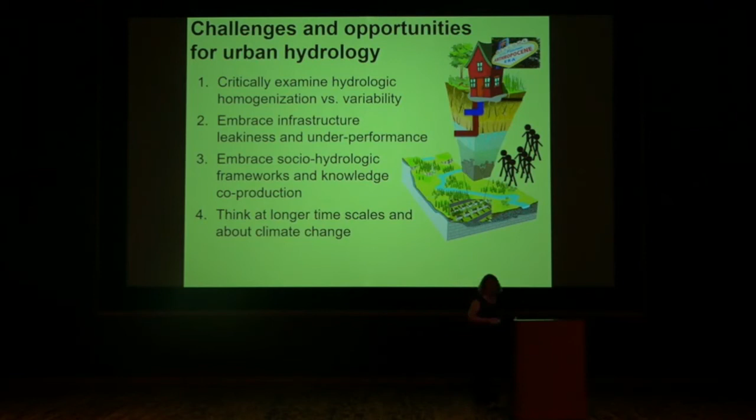We need to be thinking about longer timescales, climate change and climate variability, and how the land use decisions we are making now and will make in the future are going to have ripple effects. I should have also said larger spatial scales, because of course urban areas are not islands unto themselves. There's an urban metabolism — they're taking in material fluxes and water from a much larger area to support what's going on in the city.

So drawing that connection between the upstream watersheds and the urban areas is an important thing we need to be doing. And we need to be talking and listening to the people who live there and the people who work in these systems. And we need to not just stop with publishing papers. Publishing papers is good, but if we're not communicating our science back to the people who live there, the people who work there, the people making decisions, our state and federal legislatures, then what is the point of the science that we're doing?

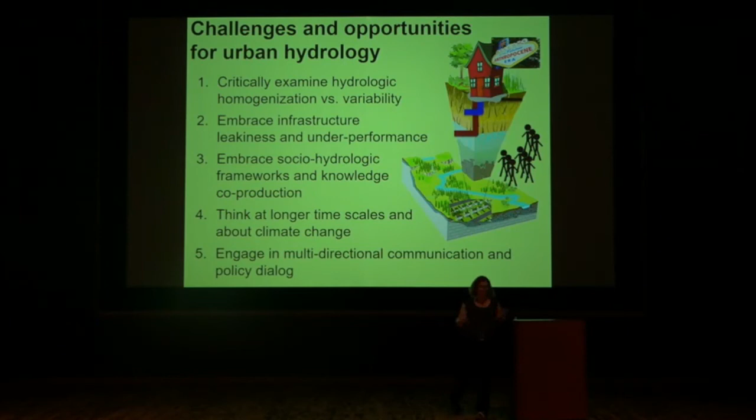Scientific knowledge for its own sake is great, but I work in human-altered environments in part because I want to help people. And so ultimately, I would argue that in a world where more and more of us are living in cities, where our infrastructure is aging and leaking — we have 200-year-old pipes underneath our cities and we're not going to replace them for another 100 years — where environmental degradation is pervasive, and where climate change is just making everything worse, intensifying the water cycle and exacerbating extremes, if you want to do societally relevant hydrology, think about doing urban hydrology, because I really do truly believe that the future of hydrology is urban.

And with that, I'll open it up to questions.

A question I have, if I'm a climate denier or naysayer, would be: do we have sufficient information for what precipitation patterns will look like under changing climate in the next 50 years that we can feed into our hydrologic models to say the 100-year storm is going to increase in intensity, or decrease?

If we think about this in an ensemble sense, and look at where these uncertainty bands are moving, then I'd say we do have some pretty good information. Also, one of the nice things about working in urban watersheds is that you end up talking to engineers, and engineers understand what the consequences of infrastructure failure are.